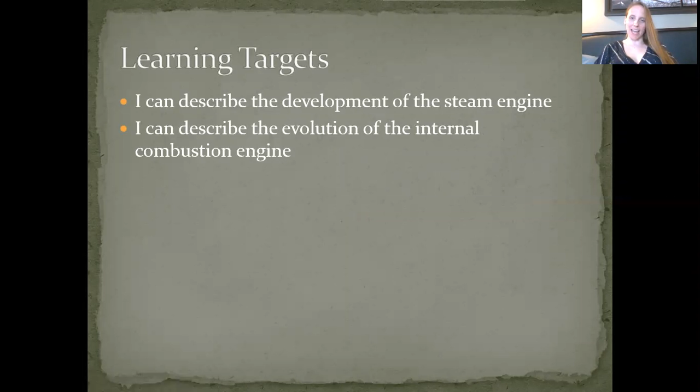Today we're going to be going over the development of engine technology. Essentially, we're just going to be looking at all of the different people that contributed to engine technology.

The steam engine was kind of the first type of engine that came around. A steam engine is any machine that generates steam and then converts steam pressure into mechanical kinetic motion. Thomas Savery was the first person to invent the steam pump. Then steam power just blew up after that and was used in all major industry and lots of different types of locomotion, trains, boats, that kind of stuff.

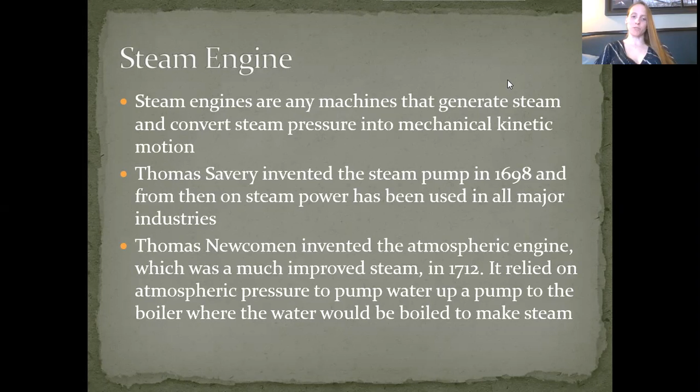Then came Thomas Newcomen, who invented the atmospheric engine, which was just an improvement on the steam engine. It used atmospheric pressure to pump water, where the water would then be boiled to make steam. That was just an increased efficiency on the way that water was transported to the boiler in order to be boiled to make steam.

Then came James Watt. He invented the double-acting steam engine, which was another improvement. It allowed the steam pressure to be diverted to different areas of the engine in order to move pistons in two different directions. There were also some gears and levers and stuff like that, that could allow steam to turn a wheel. All of this just gave more control to the operator.

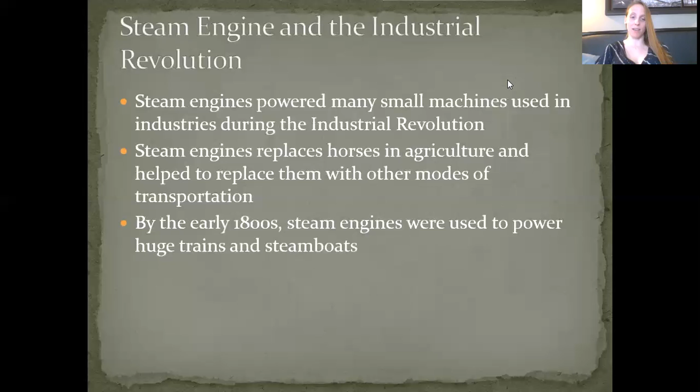Steam engines powered tons of different small machines and really helped drive the Industrial Revolution. They also allowed for the replacement of horses in both agriculture and a bunch of different modes of transportation. And by the 1800s, steam engines were used to power massive trains and huge steamboats. And to this day, steamboats and stuff still run.

Charles Parsons then kind of perfected the steam turbine engine. Essentially, the steam would pass through the blades of the turbine, causing the turbine to spin. This worked better than the pistons that had to move in the older models of steam engines. There are still huge ocean liners that use this type of steam turbine engine.

Then came the internal combustion engine, which always has at least one hollow cylinder in which fuel is burned. The fuel burning heats up the air inside the cylinder, and that increases air pressure, because when air heats up, it expands because the molecules move around faster. The air pressure is then used to move a piston, which turns a crankshaft.

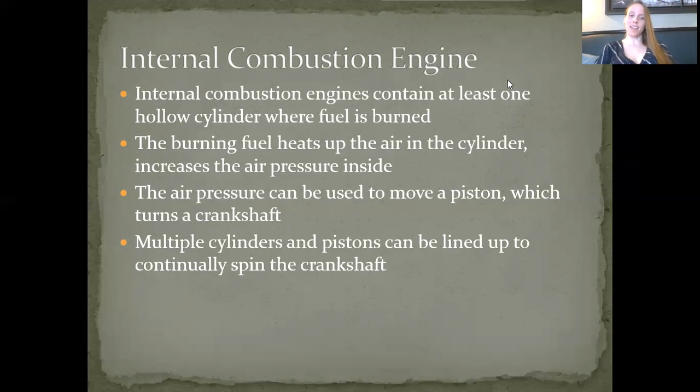Philippe Lebon invented the first internal combustion engine, and it burned coal as a fuel source. Then four-stroke engines were later developed that had four different phases with different movements.

The first phase is injection, where fuel and air are injected into the cylinder. Then ignition, where the fuel source is ignited. Then expansion, so as the fuel burns, the air heats up. As the air heats up, it expands, and that expanding air pushes on a piston.

The fourth phase is the exhaust phase. That is, after all the fuel is burned up, the air pressure will decrease again as the air cools down, and then the fumes that are left over are pushed out of the cylinder as the piston moves back into its original position, because the air pressure is not pushing on it anymore.

Present-day combustion engines contain variable valve timing, which means that air and fuel can be pushed into cylinders at different speeds. That allows the engine to be more flexible and to adapt to changing conditions. So for instance, if you need to speed up really quickly to pass a truck on the highway or something, you can have more energy in order to allow that to happen. So it increases fuel economy and engine performance by doing that.

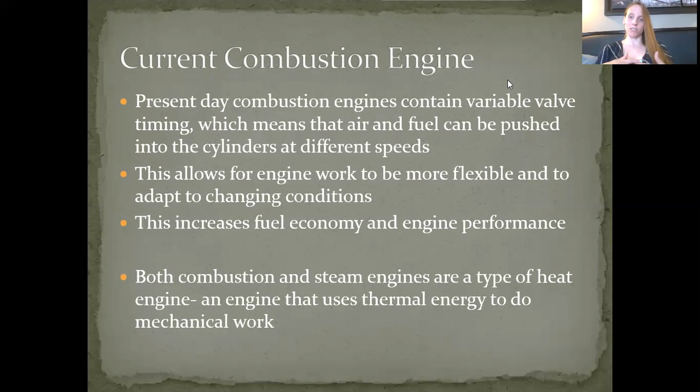Both combustion and steam engines are a type of heat engine, so they use thermal energy, whether it's the thermal energy of steam or the thermal energy of air, in order to do mechanical work, which is just the movement of the pistons and crankshafts and all that kind of stuff.

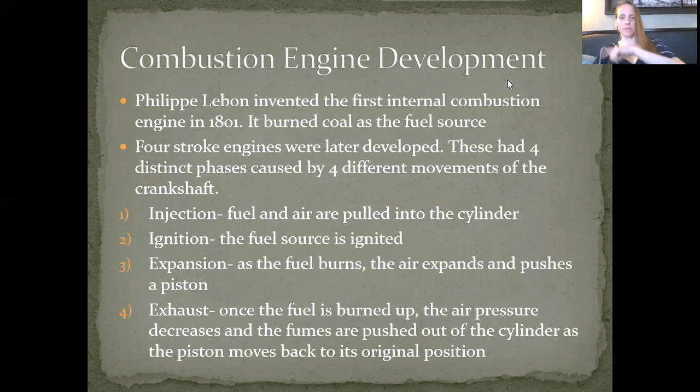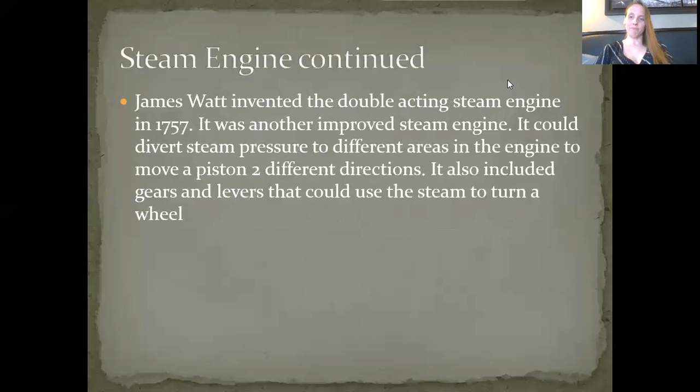That is it for this lesson. The only thing that you need to know is kind of what each person did. So go through this lesson, look at each name, and you don't have to go very in-depth into it. Know that Philippe Lebon was responsible for the first internal combustion engine. Know that Charles Parsons was responsible for the steam turbine engine, that sort of thing. So for each person, just know very briefly what it was that they invented or came up with. And that's it. There'll only be like a question or two on the unit test about this.